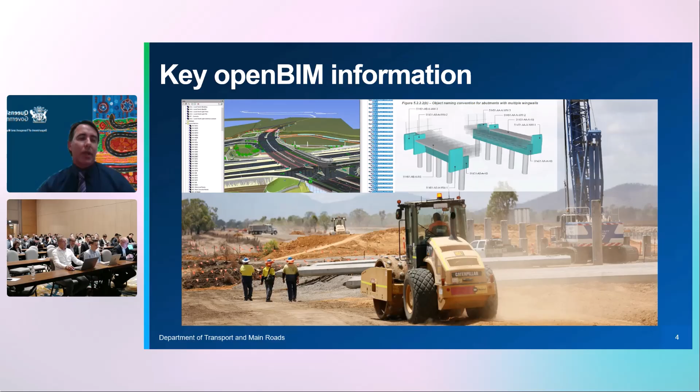TMR does not mandate the use of proprietary software. By adopting open standards such as buildingSMART's IFC and implementing ISO 19650 workflows, TMR enables industry to use their preferred software while delivering consistent, high-quality data. The system's reliance on openBIM principles ensures long-term adaptability and scalability, aligning with global best practices.

On contract award, our overarching BIM guidelines cover roles and responsibilities and direct the lead-appointed party to relevant BIM documentation downstream. Next is an Exchange Information Requirements, EIR document, accompanied by a BIM execution plan, BEP template. The BEP is the lead-appointed party's responsibility to develop in response to our EIR. TMR assesses the BEP at contract award, and we work collaboratively with the lead-appointed party as the BEP develops to meet the project's specific information requirements.

The next layer down is a suite of information delivery manuals, IDMs, that structure the data within project information models from the supply chain. Through our team's active engagement with buildingSMART Australasia, we've ensured that our IDMs are in alignment with the content and philosophy of buildingSMART's ISO 29481, the ISO standard for information delivery manuals.

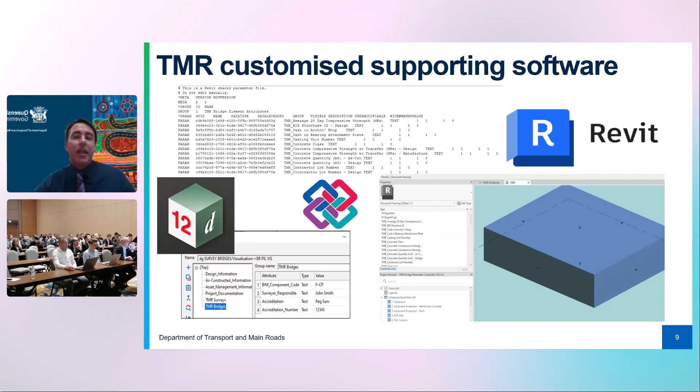TMR supports industry with customised software packages for applications that the department uses internally. We've customised both Revit and 12D with templates hosting BIM attributes. Where possible, we've applied automation to pre-fill attribute names as the user commences modelling. Our software customisations align directly with the requirements in our IFC object attribute documents and include export functionality to custom TMR IFC property sets as per our documentation.

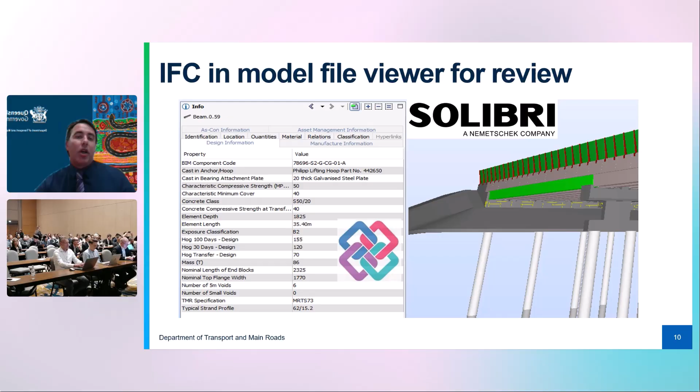The key outcome is an IFC carrying TMR custom attributes in property sets for review. Using a variety of collaboration software, the open source deliverables are reviewed against LOD and LOI requirements defined in our IDMs.

The case study submitted for this award is a TMR road and bridge infrastructure project that is currently in construction in northern Queensland. A key outcome from the Townsville Connection Road project is the real-world application of how our information delivery system supports the data from multiple engineering disciplines.

The interoperability of open source data has been leveraged through multiple software packages as the data has transitioned through each project phase from design to construction and into asset management.

On receipt of Townsville Connection Road project information models at review submission dates, our team leveraged SimpleBIM to assist with automation of review procedures. Basic examples have been applied to SimpleBIM templates that were passed against the IFC model submissions. The SimpleBIM templates interrogated the IFC structure for IFC class assignment, property set names, and attribute values.

Any non-conformances dashboarded by SimpleBIM were exported as a validation report and returned in correspondence to the lead appointed party through the common data environment.

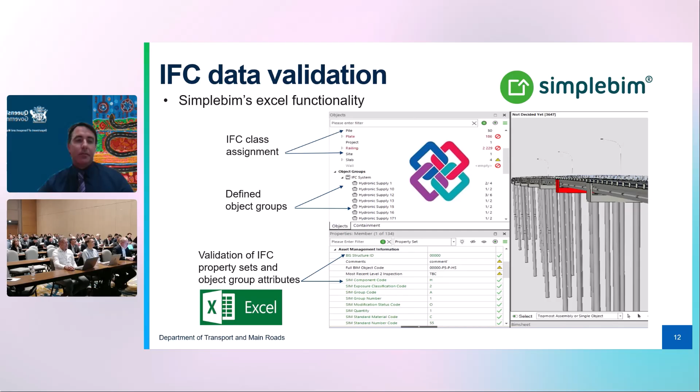The learnings from SimpleBIM validation were applied as a key outcome to progress development of buildingSMART's Information Delivery Specification, IDS. The data structure of the IFCs developed on the Townsville Connection Road project were test cases for IFC validation with IDS. Blender, with the Bonsai extension, was leveraged to export HTML validation reports of the IFC passing against the IDS.

To format the Townsville Connection Road project information models for asset management system upload, SimpleBIM was used for IFC data extraction. TMR's asset management systems do not host or support any middleware or API. All of our databases are capable of comma-delineated CSV upload. The asset management team supplies a template.

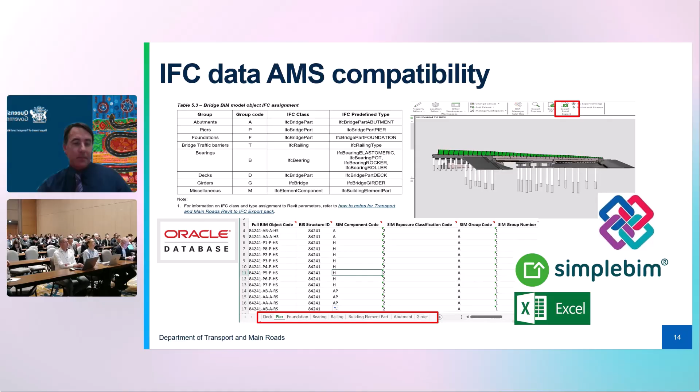From the verified project information models, the attributes of the bridge management property sets were uploaded to TMR's bridge information system, and the ITS and electrical asset management property set to TMR's road operation asset register, known as ROAR. This wakes the asset management systems up to the new assets entering construction phase. The systems are then formatted to receive construction and asset management data further downstream.

The project information IFC model on this project was produced specifically for the development of workflows and procedures for the use of IFC for bridge survey setout and construction. This IFC model is currently in use by construction surveyors setting out the structure. The model was loaded into field instrumentation, and the geometry in real-world coordinates could be read from the field instrumentation display.

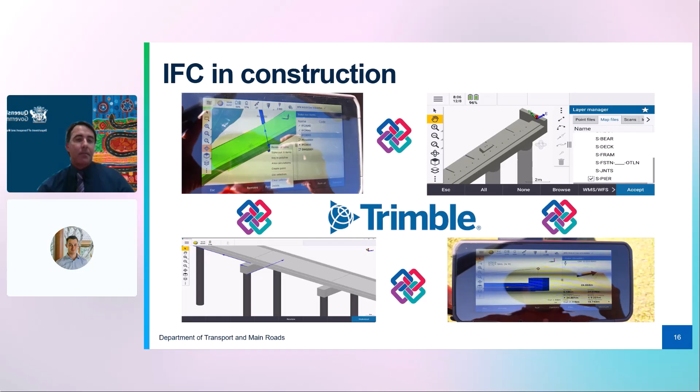A key deliverable in TMR's BIM projects is the as-constructed IFC model. The as-constructed deliverables on the Townsville Connection Road project were used as a pilot for integration with TMR's GIS framework, IMAPS. IMAPS publishes asset management data for TMR's civil infrastructure across the state of Queensland. All attributes and property sets were assigned to IMAPS for future reference.

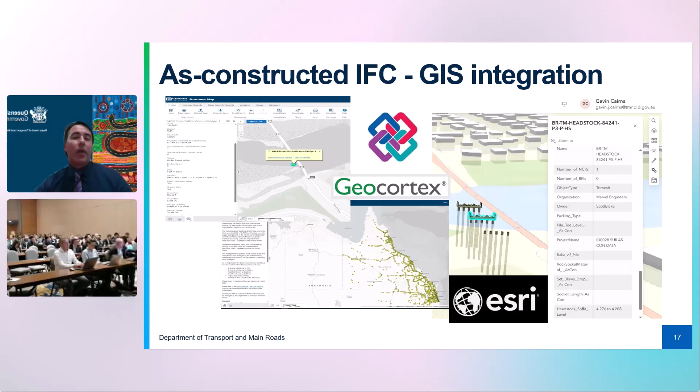TMR's BIM object coding becomes critical again here, containing fields that our asset management system recognises. IMAPS sources and publishes data from various linked Oracle asset management platforms and dashboards asset data for users. This advancement will see the ongoing collection of certified as-constructed IFCs, georeferenced, and data published for query during operation and maintenance for our statewide network.

openBIM has delivered significant benefits to TMR's asset management processes. Efficiency gains: automating data validation and integration has eliminated the need for manual data entry, which previously involved hundreds of lines of information retrieved from project drawings. This has resulted in substantial time and cost savings.

Data accuracy: the structured approach to IFC property set definitions and validation ensures that accurate, high-quality data is uploaded into asset management systems. Lifecycle asset management: BIM data integration into asset management systems and GIS supports asset management activities throughout the life cycle of infrastructure, from design through to operation and maintenance.

Interoperability: the adoption of openBIM standards such as IFC ensures compatibility across software platforms, enabling industry partners to work collaboratively while meeting TMR's information requirements. This initiative demonstrates how openBIM can bring value to infrastructure projects by fostering efficiency, collaboration, and long-term asset sustainability. By adopting openBIM tools and methodologies, TMR has demonstrated its commitment to delivering infrastructure efficiently and effectively for the people of Queensland.

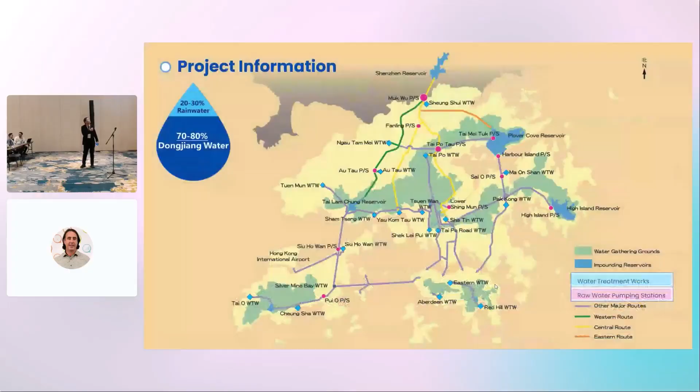Okay, so here is the map of Hong Kong. Actually, it is the entire map. Our goal is to use the digital twin solution to digitize our physical asset.

As you can see, the red and blue dots and colored lines represent our water treatment plants, pumping stations, and water mains, large water mains. These assets are interconnected, and they serve over 7 million people in Hong Kong.

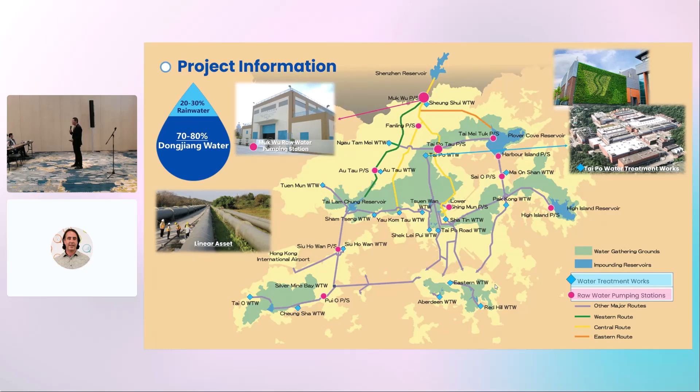We use BIM to support the digital twin, enabling ongoing optimization and improvement, and that is the asset management as well as energy management.

We are using openBIM and BIM data to build a smarter, greener infrastructure with investment of 56 million and over 40 experts from IT, BIM, and hydroinformatics.

We are creating a digital twin that helps us manage assets better and more effectively. So better and stronger.

Well, I always, when I see Stephen Hawking, he always explained the universe is called a cosmic cookbook. This is our digital transformation cookbook. We have 4 ingredients, which is the BIM, AI, GIS, and IoT.

The system integration is vital to our success. Using the openBIM framework, we combine BIM, GIS, IoT, and AI technology to deliver real-time insight, inform decision-making, and enable intelligent operation across every water infrastructure asset.

We have many BIM models, I'm sure, like the government agency or the commercial areas. So we have a lot of BIMs, but after the design construction, what are you going to do about it? How do you drive the value from the BIM models?

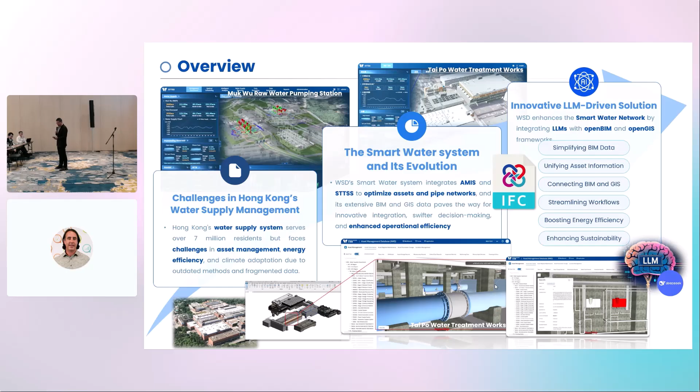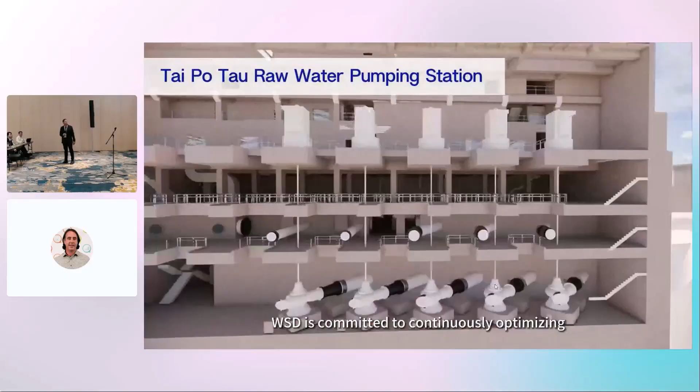Our goal is to build a system that is both sustainable and resilient. This pilot project marks a major step in that journey, integrating openBIM and openGIS standards into STTSS and AMIS to enhance asset and energy management.

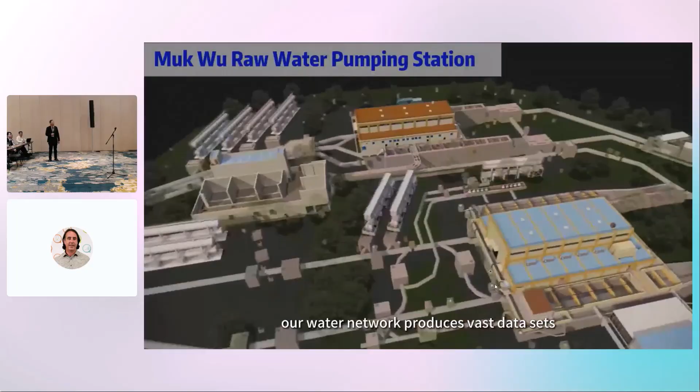Most recently, we've introduced large language models to further strengthen our smart water operations. This framework reflects years of advancement. Our water network produces vast datasets, from IoT sensor streams to detailed BIM models.

We apply lightweighting techniques, using tools like Supermap, to reduce system load while preserving essential detail. openBIM and openGIS form the backbone. IFC structures asset data in AMIS. GeoJSON organizes spatial data in STTSS.

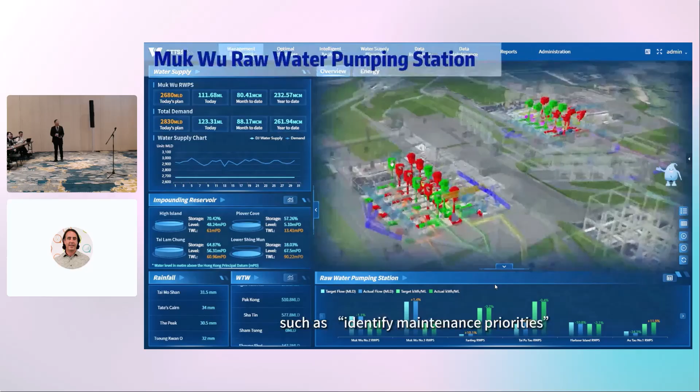Now, LLM enhances the ecosystem by connecting, analyzing, and making the data more actionable across operation and maintenance. Operators can now issue simple commands such as identify maintenance priorities or optimize pump schedules. The LLM responds intelligently, trained on historical records and simulation logic, leading to reduced energy use, operational cost, and risk.

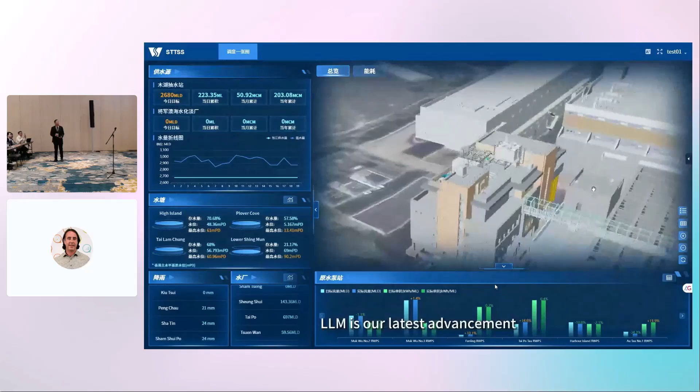With openBIM and openGIS, we've built a connected, visualized system. LLM is our latest advancement. We collaborated with global water experts and shared our AI-driven openBIM innovations, fostering the adoption of sustainable practices, bringing us closer to a sustainable, intelligent, and operator-centric future.

openBIM is key to building a smart digital twin. Basically, openBIM or BIM is the backbone of the digital twin. It must be. It helps us enable smooth data sharing and interoperability for our asset management information system.

Basically, it supports the asset management system, ISO 55000. And our smart trunk transfer support system also supports our energy management policy, ISO 50001. So basically, it's asset management and energy management. We have 2 systems supporting us.

In the ecosystem, our software solutions always support the openBIM standards because our assets are designed to operate over long lifespans. Actually, our Water Supplies Department has 160 years of history.

Not surprising, we have water mains over 50 years old. So several decades to over a century.

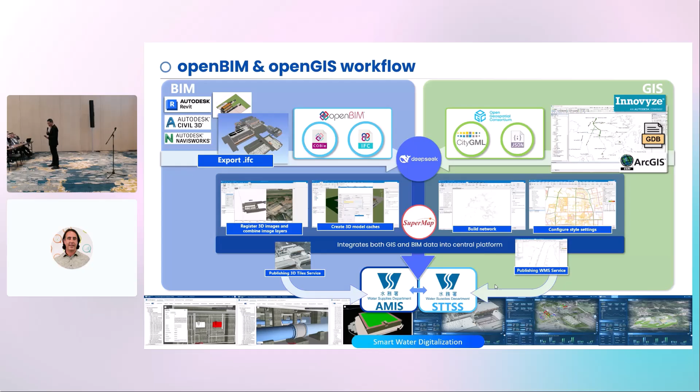So right people, right information, at the right time. This is our goal. For the workflow, we integrate openBIM into our workflow to standardize data and ensure interoperability and seamless data integration. It also enables smooth, efficient digital handover, essential for effective asset management and smart operations.

We need to instruct the AI to filter the raw data and remove non-essential information. This ensures that only critical asset and operation data are retained in the BIM model, maintaining an optimal level of detail for effective integration and streamlined workflow. You have a BIM model, you need to filter off the information that is not essential, and we managed to push the efficiency up, saving 58%. So you need a faster model in order to allow our users to work on it.

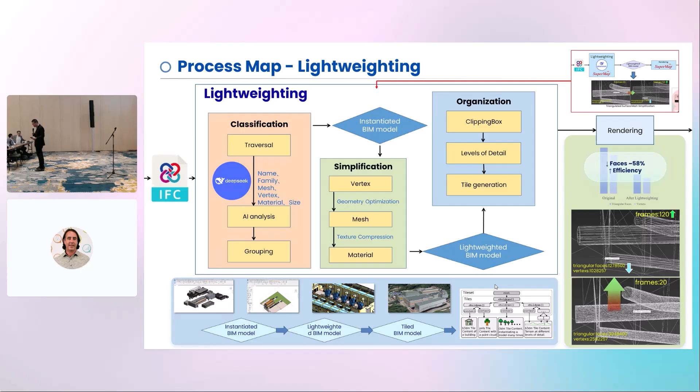This actually I'm quite proud to show you. For the BIM model of the underground asset, I call it SAD and LAD. SAD is a surface asset database — the pumping station, treatment works, reservoirs, access road, all these are called surface SAD. And the LAD is actually, in Hong Kong, we have over 8,000 kilometers of water mains. So basically it's two different classes of asset, but we need an integrated system to pull this asset together. We have BIM, we have a digital mapping system, and we also have a work order system.

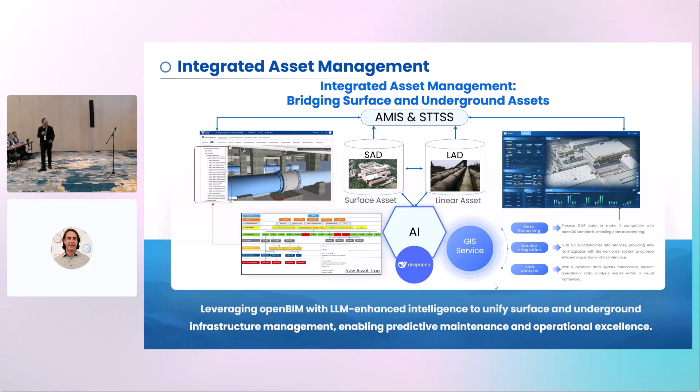So you need to keep track of the cost. So how do you do it? Of course, I'm going to show you. We also developed the smart trunk transfer support system. This is basically the same process as the AMIS, except the challenge is the geospatial aspect. So it's 2D, 3D, and at the same time, the digital mapping system all working together for the energy optimizations.

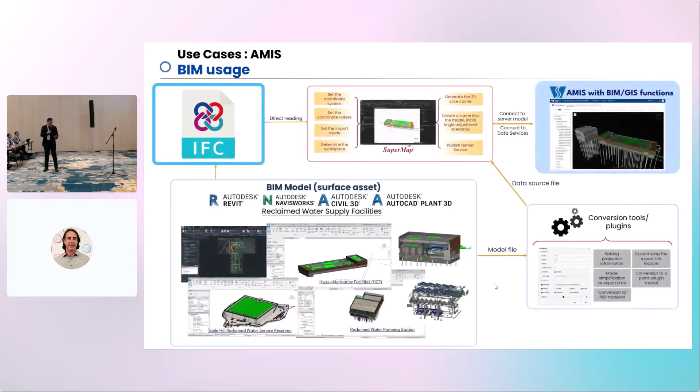So AMIS used openBIM to connect asset data, model, and inspection. It ensures consistency with IFC, supports risk detection via LLM, the large language model, and enables smart mobile-driven maintenance for efficient asset management. We have a mobile device to capture the asset conditions. So the operator will go to the site, use the QR code to recognize the asset, and then keep track of the asset condition.

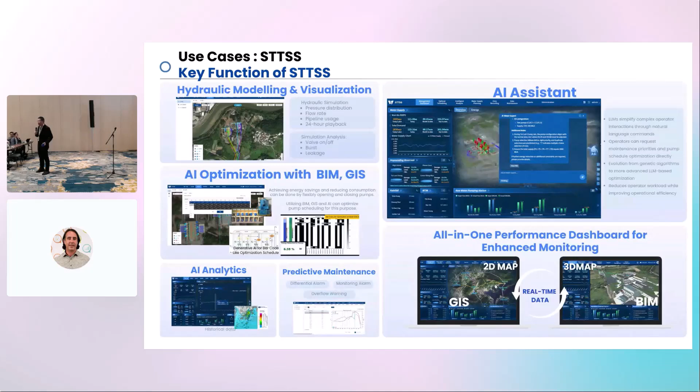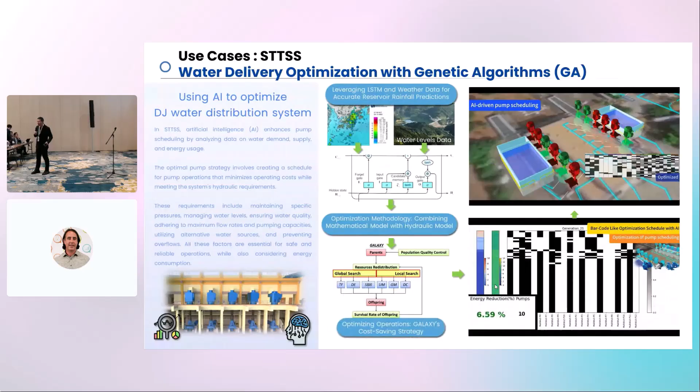If we do the maintenance, we must understand what the asset condition is. It's simple, right? If you know the conditions, you will be able to do predictive maintenance, condition monitoring. You're able to save money on maintenance, electricity, and energy costs as well. Simply said, we want our assets to be healthy. Simple as that, okay?

For the STTSS, for our projects, we spend about $300 million for electricity bills every year. So we import water from China — it costs us 3.4 billion a year, and the energy cost alone is 300 million a year. So we'd like to optimize the energy for the pumping schedule optimization. This is basically the system that we developed.

So our KPI is maintenance cost reduction. It's like a human — we keep ourselves healthy, we spend less on medical and healthcare stuff, okay? Energy-wise, for the pump scheduling, we are able to do it smartly, so we can save energy. It's not that difficult. And then carbon reduction and data integration — this is all because of BIM. We need good data and we need a good model, and then we need an openBIM framework. So it's openBIM framework, openBIM standard, and good asset data to do our business well.

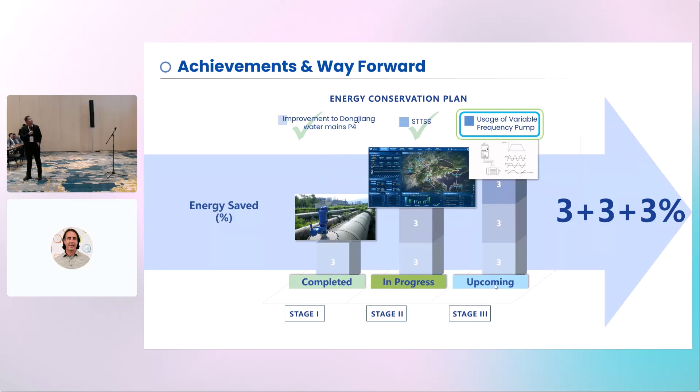So when we upgrade our system with the variable frequency pump, it can save up to 30 million a year in electricity, and 18,000 metric tons of CO2.

So actually we have achieved the SDGs by 3%, so it's 10 million. It's a real saving, because I checked it in the electricity bill and compared it with last year's electricity bill. So it is true. And I'm accountable to my director and assistant director on that as well.

So you have a BIM model, but you need to downsize it or make it fit to work in the platform that we develop. Okay, so BIM and GIS and the asset management platform to monitor energy for energy savings.

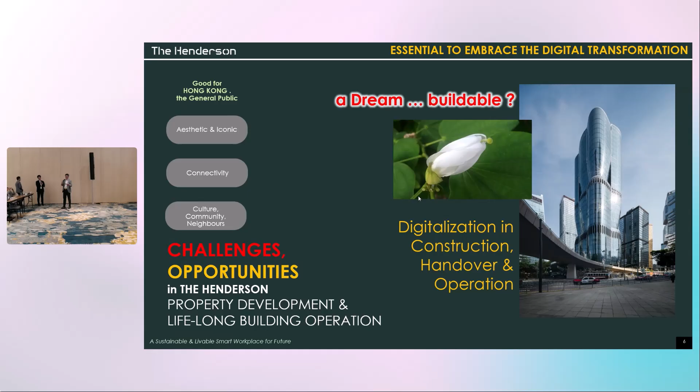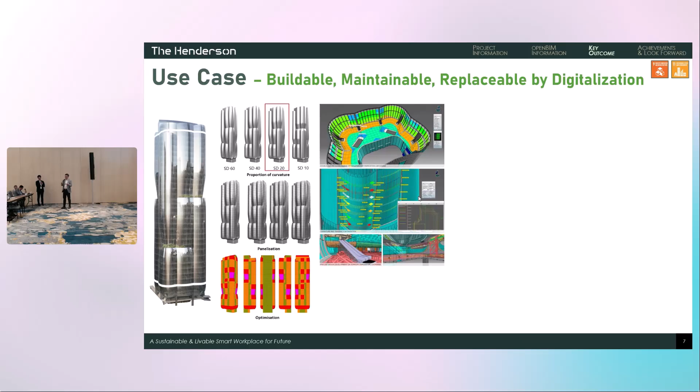After the facade optimization process, we finally still have over 1,000 different curvatures of facade panels, so it's definitely not feasible, not buildable by traditional construction method. So in our case, what we have done is go through construction digitization. We don't have any spare parts, so in case we have to order any piece of new glass in the operation stage, we go through the same digitization process in the manufacturing.

The second challenge is climate change, extreme weather, public health and safety. Those are the prominent challenges nowadays. openBIM is useful in building up models, for example computational environmental modeling, operational resilience, asset database, and also BIM integrated facility management portal. For all the glass panels, we have the latest BIM model for factory fabrication.

We have openBIM models for asset management. We also have the combined BIM model going to our facility management portal, and we keep all those models in the CDE as the single source of truth.

In the case any glass replacement is required, what we have done is just use the RFID scanner, scan the glass, get the access, and then we order the glass.

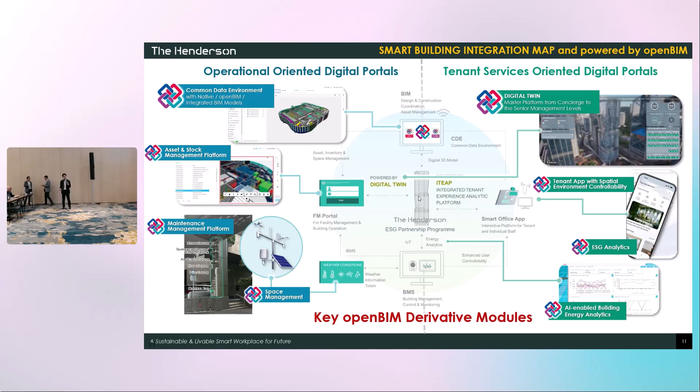Here we come to the main contractor's perspective, so it's about the technical part. Throughout the project lifecycle, we have used different software in terms of their expertise, like Revit, Tekla, CATIA, or Digital Project. And then we federate the information through openBIM to support the wide diversity of expertise, enabling day-to-day smooth coordination, fabrication, and then operation.

There's a saying, Rome wasn't built in a day - so that's a good model. An asset model cannot be built by one party, right? So starting from the delivery stage, our client developer already stipulated in the contract IDM that all the key stakeholders must engage in full BIM authoring, openBIM exchange, and CDE use. We, as lead of the execution party, standardized the IFC exchange protocol from different software by defining the right model view definition.

And then it results in seamless collaboration from level of information need 300 to 400. We also use BCF as a neutralized medium for issue tracking in Solibri, in Trimble Connect, and so on.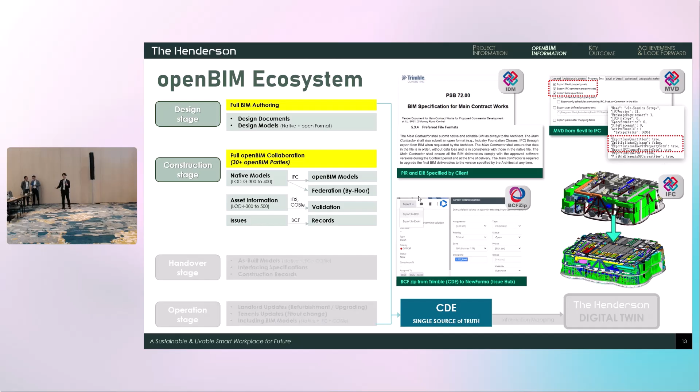At handover stage, we formed a facility management task force early, 2 years before occupation, aiming to develop a proprietary COBie cookbook for Henderson, which we wanted to be rigorously standardized and friendly understandable by all the parties. Here, we want to express our thanks to buildingSMART bSDD and UCM, and also the Hong Kong government, who shared a lot of asset protocol through bSDD online, so that we do treasure their references there.

Additionally, we use the IDS to validate our subcontractors' input in the as-built models, ensuring that they have input the key parameters like asset code, asset group, and room parameters. At the handover stage, we form...

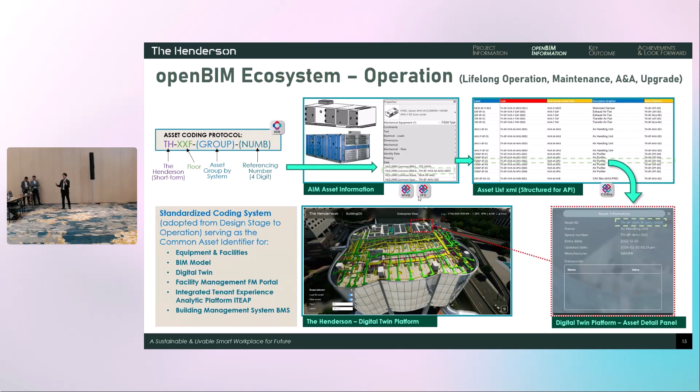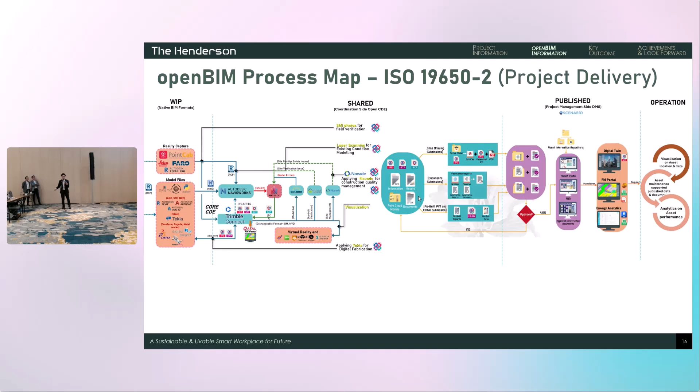Now we are going to the long lifespan operation stage. The key information is asset code. It is vital because it acts like the human being identity card number to link all the asset-related attributes between BIM and operational digital twin platforms. As we have deployed a meticulous open BIM process during the delivery, design, and construction stages, we are now enjoying a bright road of data sustainability in the operation stage.

We want to lead ISO 19650 to the 3rd chapter, not only about maintenance, but also about future delivery, like renovations. So our end users, tenants, must take part. They need to update their asset model in IFC and IDS, and then submit the data to our facility managers through the common data environment, so that over 1 million pieces of data can fit and dance in the digital twin platforms. We are confident that this pioneer project sets the anchor of openBIM sustainability, especially on the private developer side. We are also dedicated to share our experience with the government, who wants to launch openBIM in statutory submissions by 2029, because in the delivery stage we set an anchor of openBIM foundation.

Now, Edward will tell us more about how we can use the functions.

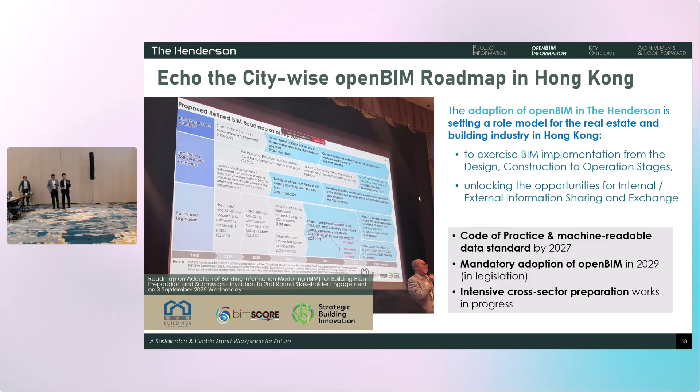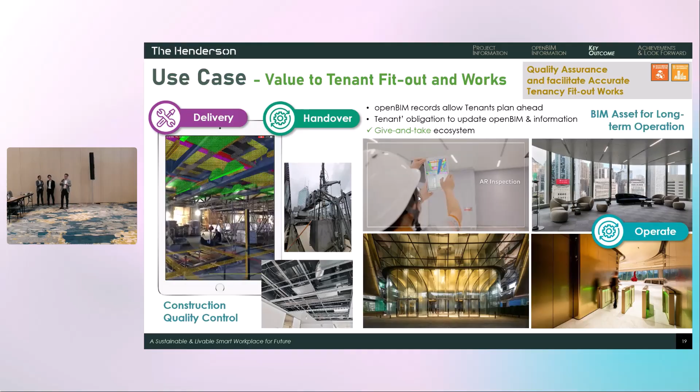In the handover stage, we adopted laser scanning and augmented reality technologies to carry out quality checks on site, and also ensure what is being handed over to our tenants and customers is consistent with the as-built drawings. When a tenant moves in and prepares for fitting out, they have to provide their BIM model, and then we integrate that BIM model into our building master BIM model, and also update our digital twin.

The BIM is integrated into the facility management portal, as mentioned before, in the handover stage, and the asset information and corresponding BIM model can be used on the web-based and app-based platforms, which are useful for maintenance on site and also for connecting with the preventive maintenance module.

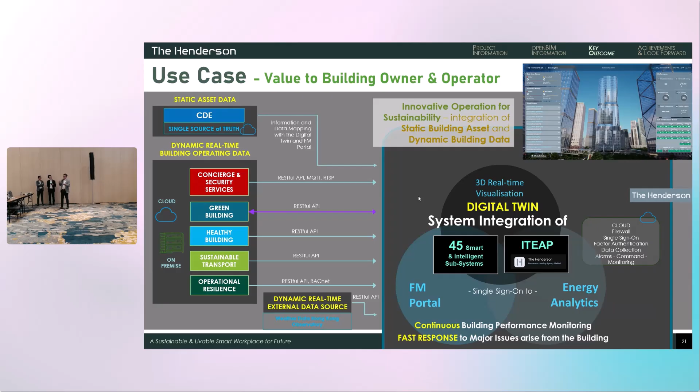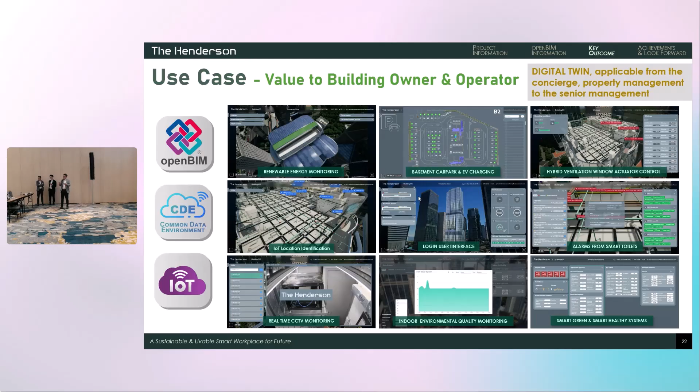The purpose of the digital twin is to realize data-driven building operational management, spatially enabled by openBIM technologies. The digital twin is now connecting with 45 smart systems inside the building via different communication protocols. Those are some user interfaces of our digital twin you can see in actual building operation. The spatial model originates from the BIM model but is visually enhanced to game engine standard.

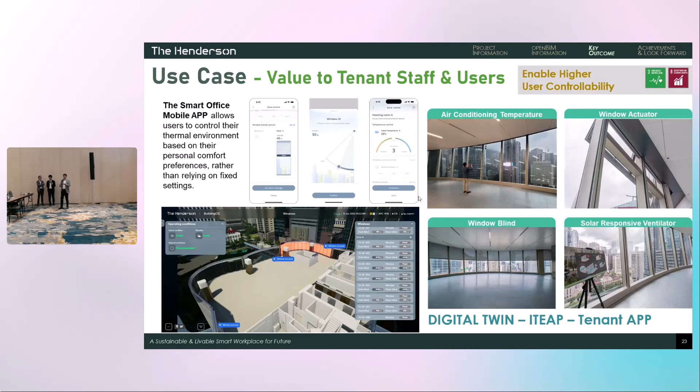The office interior environmental controls, such as solar blinds, motorized openable windows, and room temperature, are all connected with the digital twin and the smart tenant apps. Each of the devices is mapped with the static asset data in the BIM and also the dynamic data points from the building system, to ensure seamless control and monitoring of the indoor environment by our individual users.

Henderson is getting tenants and individual staff involved in the ESG journey. They collect and analyze energy, water, waste audit, and carbon data from both landlord and tenant sides. These are part of our ESG partnership with tenants and individual staff, embracing carbon neutrality, health and well-being, integrated culture, and partnership for good.

As a successful openBIM and digital transformation showcase now in operation, we have put extra effort into sharing our experience and technology know-how with the industry, practitioners, and students. Just like last year, we offered our sharing at the buildingSMART Asia Summit, followed up with a technical visit to the Henderson.

Because we have been collecting a lot of data from our digital platforms, such as the local weather station, the car park, or even the electrical vehicle charging station, our digital twin is ready to share that data with the citywide open data, smart city open data platform, or exchange it with other external data sources.

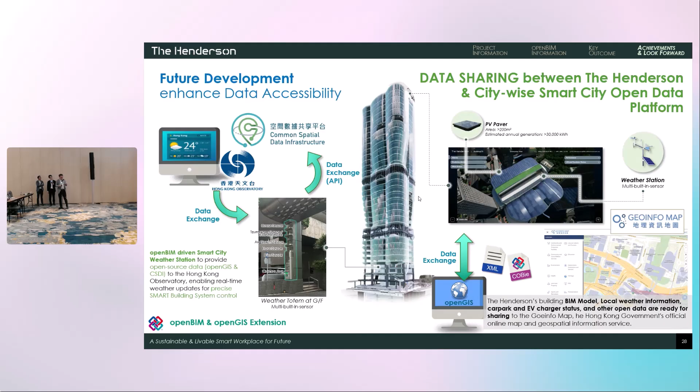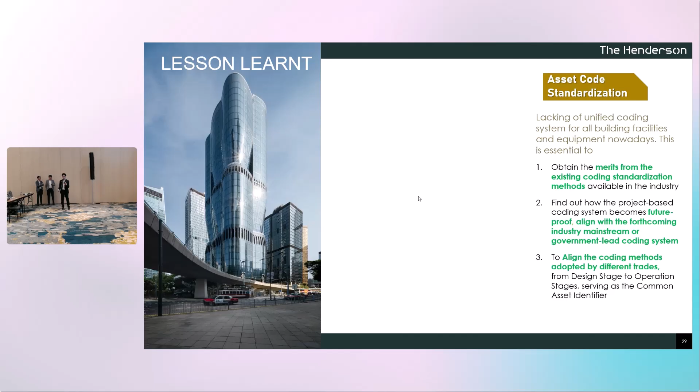The second lesson is engagement. Getting the whole team into the openBIM collaboration platform, we need to set up a dashboard and frequently monitor all parties' engagement to encourage those who are reluctant to use the CDE. The overall result is constructive, and we really encourage them to cultivate a good mindset. We value both top-down and bottom-up opinions.

In our capacity as developer, owner, and operator of the Henderson, the overall project management strategy obtained the blessing and budget from our top management, and getting the right mastermind, the right team, and setting out the roadmap are all beneficial to the openBIM journey. Many people are involved in the operation stage, so successfully influencing internal stakeholders will be crucial. That is the end of our presentation. Thank you very much.

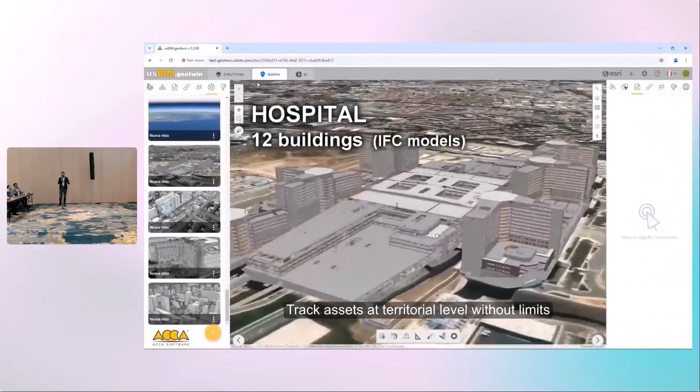Hello everyone. Today I would like to talk to you about usBIM.geotwin, openBIM GIS Digital Twin. First of all, what is it? It is a system that allows us to keep track of important assets at a territorial level without limits on the number of IFC models used and their extension.

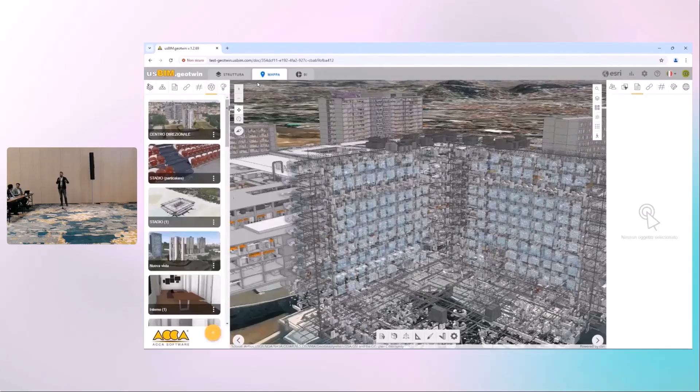openBIM is always at the center because it allows democratization of information, meaning that it is cheap and accessible to everyone. IFCs are always at the center, while IDSs, information delivery specifications, are used to make sure that data is actually in the models and for collaboration with other external systems, such as GIS, facility management, and so on. We will see more on that later.

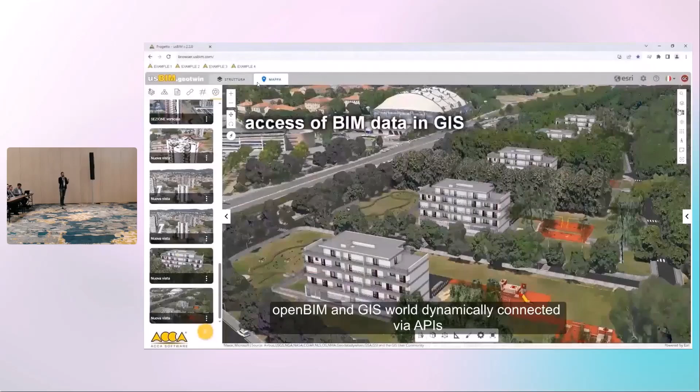Such connections are bidirectional and dynamic and done via APIs, meaning that the exchange is in real time. So from the openBIM model, I can go through the GIS data, and vice versa, from the GIS world I can query the openBIM models.

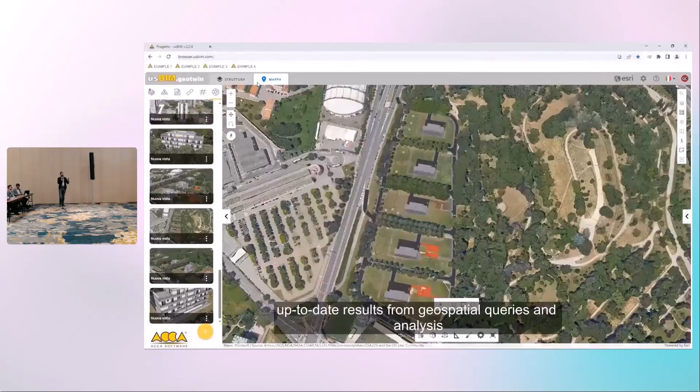What that means is that when we use tools such as spatial queries and analysis, we get real-time results directly taking the data from the openBIM models.

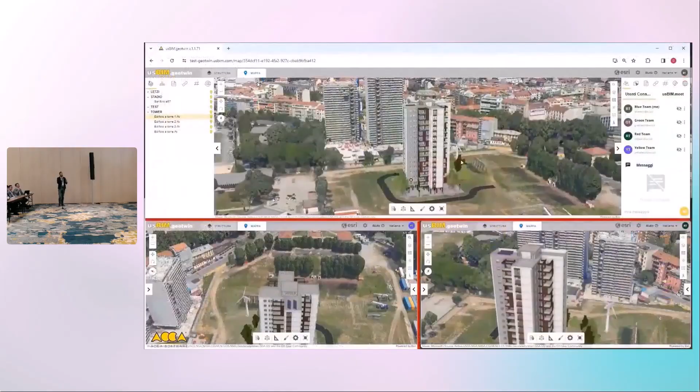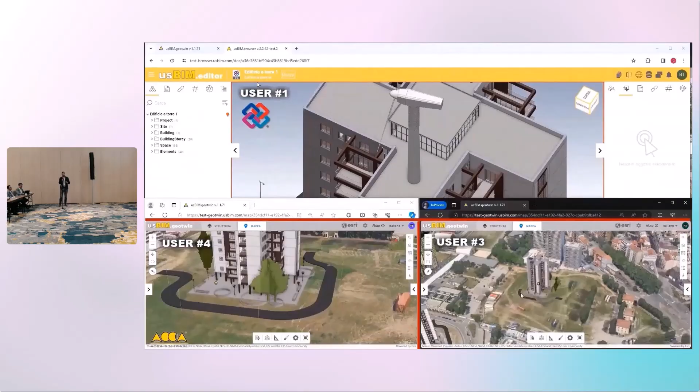At the foundation of all of this is the ability to edit the IFC models, because we think this is fundamental - in the operations phase, we can be many years after the handover, where we cannot rely anymore on the BIM authoring software that produced the openBIM model in the first place. So there is the ability to edit such models dynamically, both from a geometrical point of view and about the data.

BIM and GIS users are not disrupted in their jobs, meaning they continue their independent operations. Other standards that are used are the BSDD for standardizing the information used, and the BCF, the BIM collaboration format, for communications among the users.

But let's see some real-world examples. The objective that we have in mind is quite clear. We want an enhanced operation phase, and we want to make use of our digital twin to not make it just a mere digital shadow.

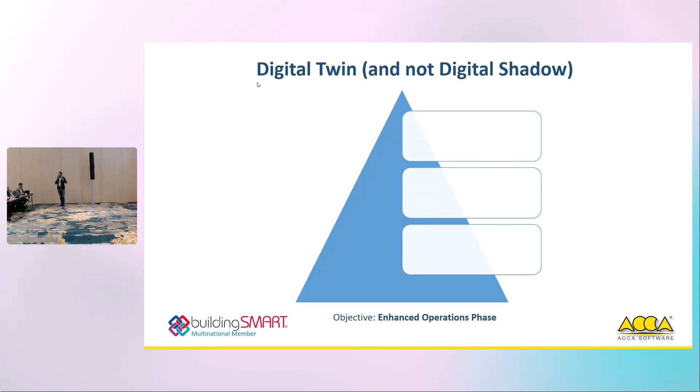As a minimum, we would like to be able to use our openBIM models from different actors and different people. And of course, we would like to be able to digitize the inspection and maintenance process. This alone will be worth the effort of creating the digital twin and keeping it up to date. So let's start with an example.

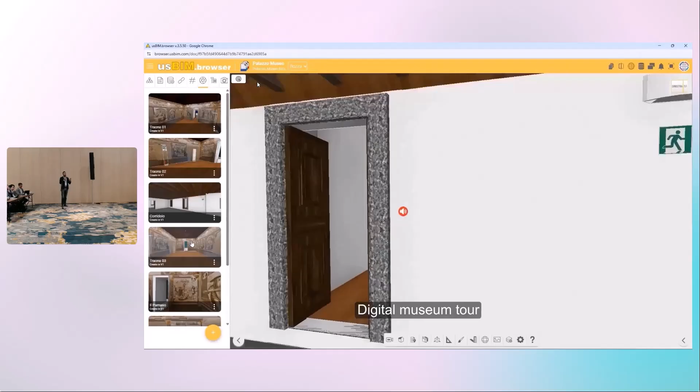This is the Besta Museum from Italy, a small one, but very important nonetheless. First of all, we can take a digital museum tour so people can experience it, for example, by consulting painting documentation. Just a technical note - as IFC is not very texture friendly, textures have been overlaid on top of the IFC model. But we can consult the documentation.

We can talk with an AI companion or smart guide to ask during our digital tour about specifics of the paintings, but also in general about trivia about the museum. Audio guides and other accessibility tools are very friendly, also for impaired people, to make the model accessible to everyone.

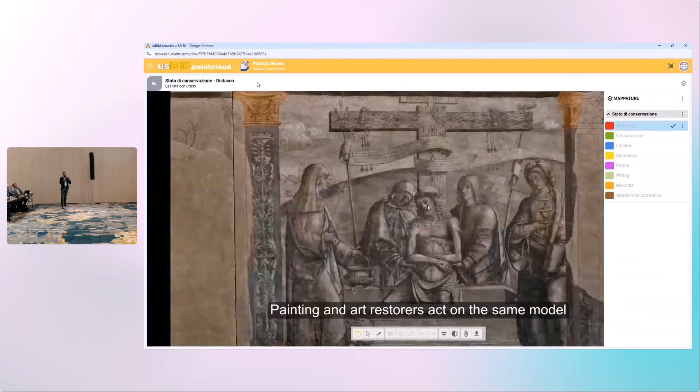Different users, completely different users like painting and art restorers, are using the very same model, taking the defects of the painting for their maintenance processes, but always acting on the same IFC data underneath.

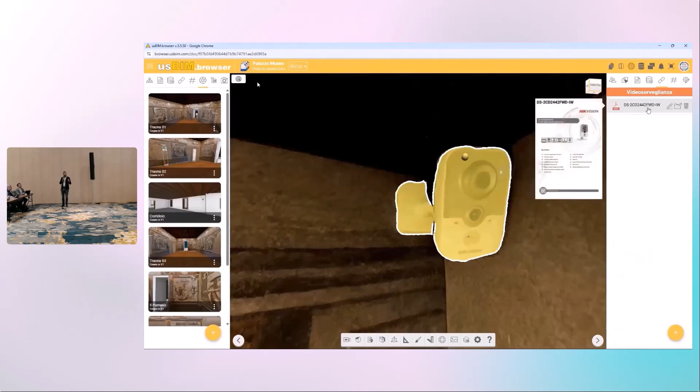There's the possibility to enhance the model, for example, after a survey with cloud points - the possibility to create new objects, segmenting in an automatic or semi-automatic way, which allows creation of new objects, attaching documentation, and so on.

In general, updating the IFC model is very important for this museum because they host many temporary events and the furnishing needs to be rearranged. So again, we cannot rely on the original BIM authoring software that created the model for that.

Also, all the objects that are being added or moved around are directly connected with their asset management system in a bidirectional way. What does that mean?

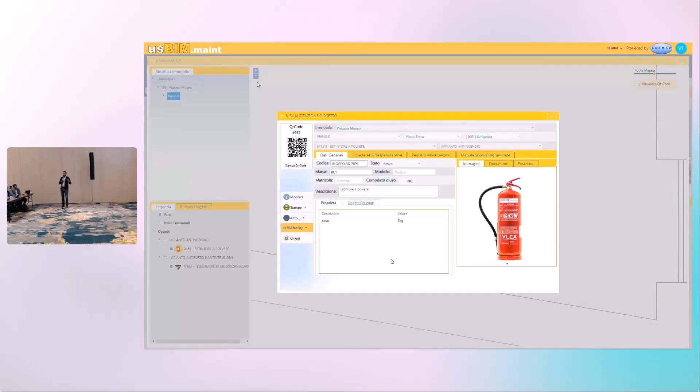We can inspect the asset management system of the museum, identifying the assets and seeing the tickets that are open, the status of the maintenance, and so on - again, from a completely different set of users.

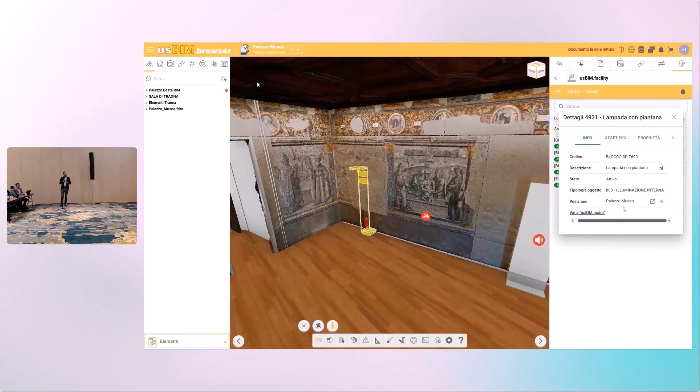From there, we can decide to go to the model because we have this bidirectional connection with the objects. And from the model, we can select the objects and see the status of the tickets directly in a dynamic way with the asset management system. Again, same IFC model, different actors. So the IFC model on the CDE is the single source of truth for all the operations.

Now, we also want to be able to gather data that comes from the asset in the real world and bring it to the digital twin. Then we would like to be able to do some analysis on such data, because we would like to see what happens on the territorial scale, to see where we have to put intervention.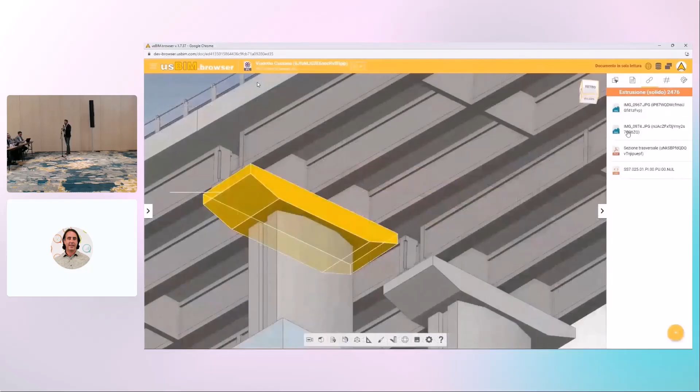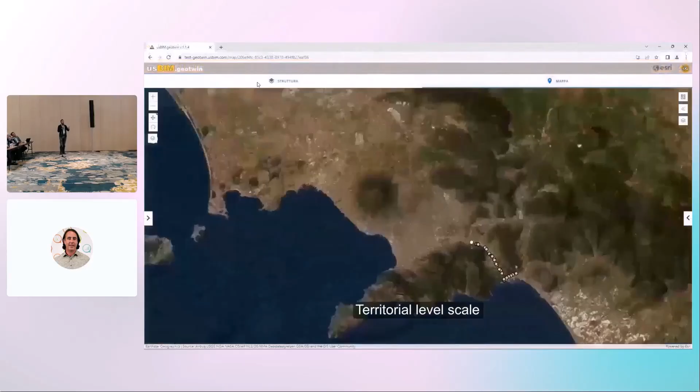This allows the system to automatically calculate the damage level for the single object and for the bridge as a whole. But it is when we scale up at territorial level that we see the real potential. Road owners, a completely different category of users, can see on the territorial scale where the problem lies, where to put their money for intervention, and where there is a critical need for intervention, all while other users are keeping the system updated with the results of new inspections. And again, the IFC models are always at the center of all the operations.

This is another example, from RFI, Rete Ferroviaria Italiana, a public company for railway in Italy. First of all, for their digital twin, it's very important to have the possibility to insert new IFC models and make them take part of all the operations that other models are already doing. So this model is in constant evolution.

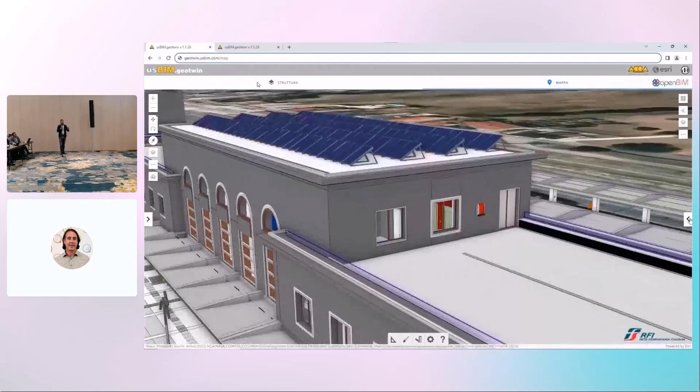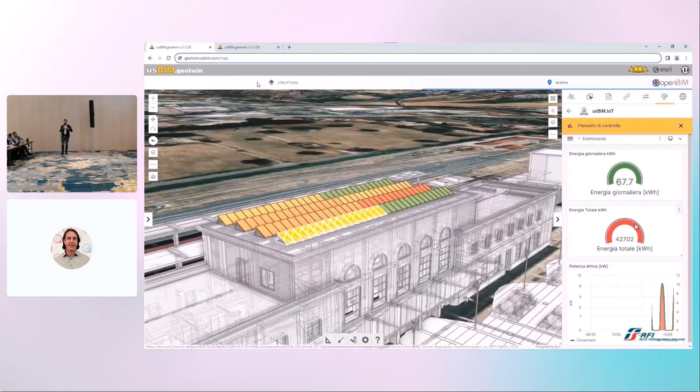One example is the connection of some of their station photovoltaic systems with IoT sensors. So we are gathering data in real time and geolocalizing and showing such information directly on the IFC model. Put this on a scale with many stations, and we are gathering data from different photovoltaic sources and bringing this data for analysis.

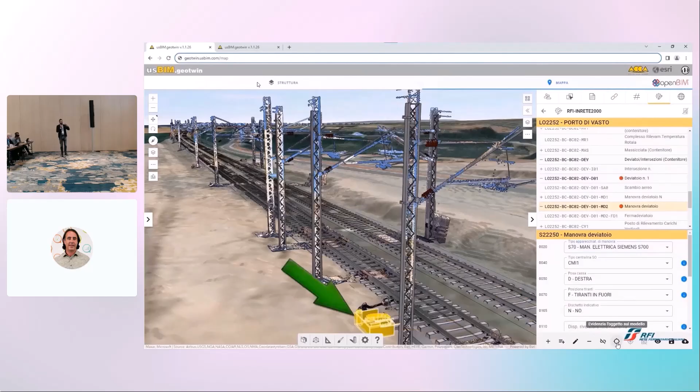Last but not least, to make the digital twin really dynamic, there is a bidirectional connection with their facility management system InRete2000, which allows updating the IFC model, which in turn updates the facility management system, and vice versa. Users from the facility management system can change the values, and the IFC model gets updated accordingly to the RFI needs and specifications.

Ideally, we would also like to be able to gather all of such data from the real world, put it on the digital twin, and run simulations on it, and to analyze such data with the business intelligence connection, because we would like to make risk prevention, to define what such risk criteria are, and to be able to analyze the data to act accordingly to prevent them or mitigate them.

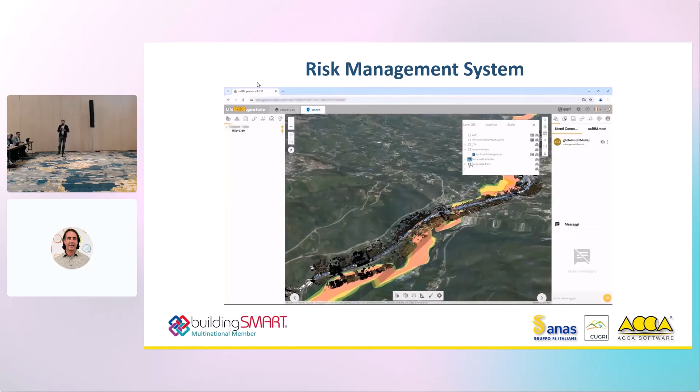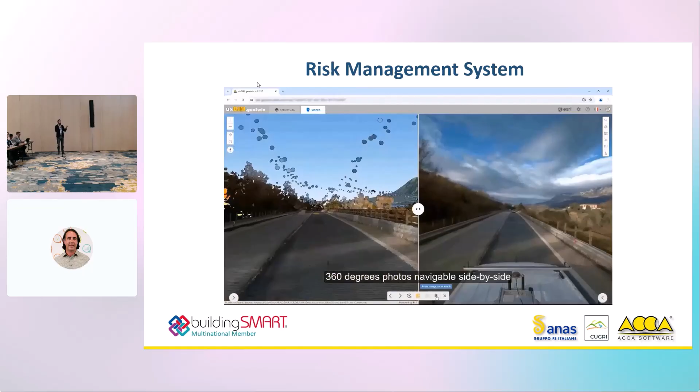This is another example, again from CUGRI, this time in collaboration with ANAS, the Italian public company for roads and bridges. First of all, we can see GIS data on geohazard risks combined with the model, and we have the possibility to make a walk along the alignment of the road, and to also have other kinds of data, such as 360 degree photos, navigable side by side. At each point, we can stop and see what is the associated geohazard risk level at that point of the road by querying the information on the GIS side.

But as I was saying, it's important to have the possibility to gather data in a standardized way. This means road owners can decide how the different users of the system have to gather different kinds of data. It can be data about road accidents, for example, or data about road defects that can be geolocalized in the model. It doesn't matter how they decide the data is structured, because then they can collect data from all the users of the system and put them into analysis with the BI, business intelligence, integration.

So take, for example, the risk of car accidents. Once data is collected and structured in this way, we can use interactive dashboards and BI analysis to analyze the causes and consequences of such accidents, and also plan to minimize the same risks in the future. For example, we can expect similar roads which may behave the same way, so by solving a problem on one part of the territory, we can also have a solution or mitigation for other parts as well. But with business intelligence, this is the power that we can analyze the data that we gathered in a standardized way from the different users of the system.

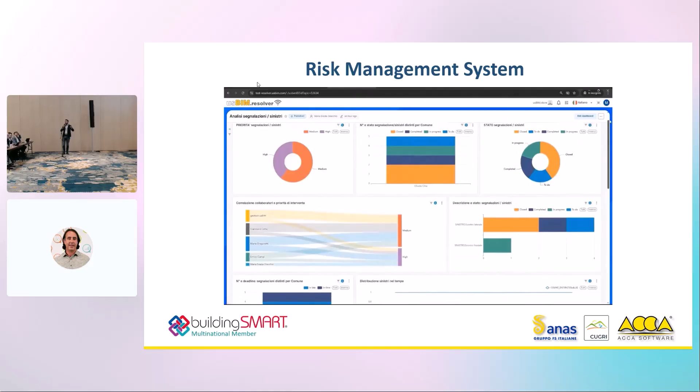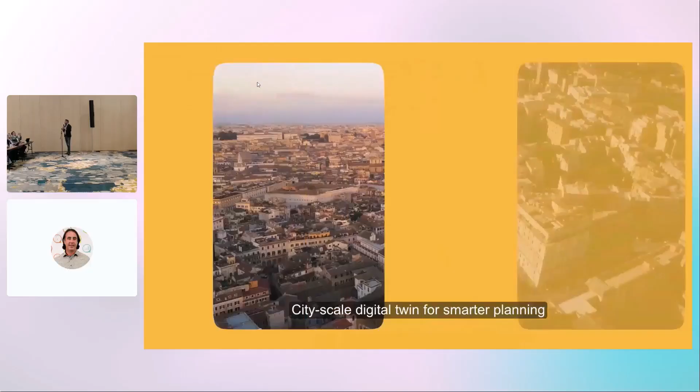Last but not least, a project fully dedicated to sustainability. It is called Rome Open to the Future and is a collaboration between ACCA Software, Esri Italy, and the municipality of Rome. It shows how to combine openBIM and GIS information to achieve some of the sustainability goals of the municipality of Rome, using data about mobility, green areas, services, energy, life cycle impacts, and so on to make strategic decisions.

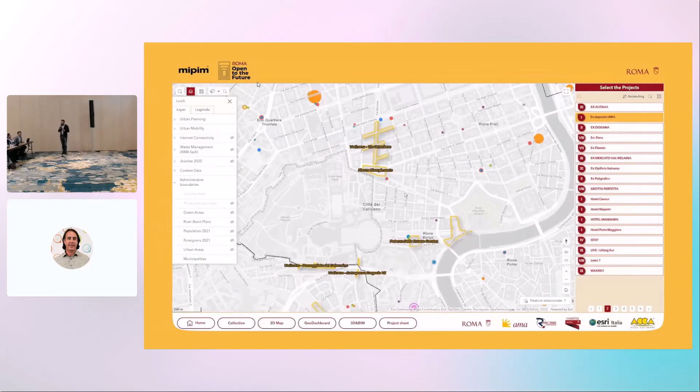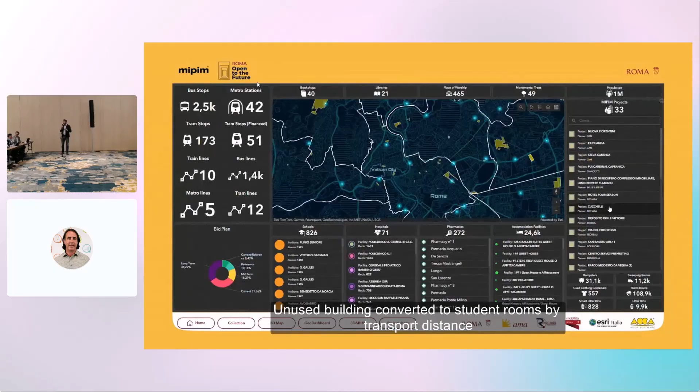One example is the refurbishing of some old buildings into student rooms, chosen by strategically planning the distance to travel services and other strategic factors. This is the example.

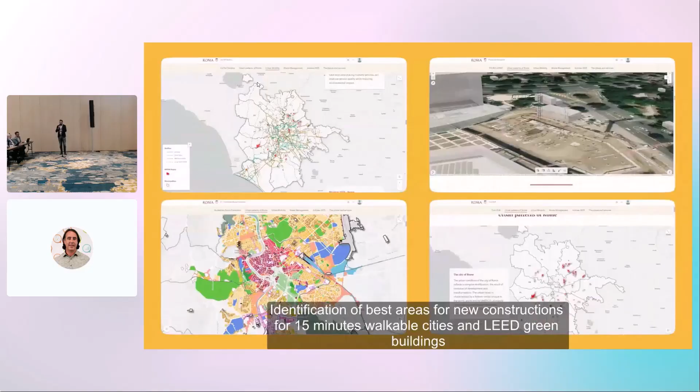There is also a refurbishing of a historic architectural building into a hotel, keeping intact its architectural beauty and storing in IFC parameters the sustainability impact values, which have also been used in another finalist project, BIM Sustainability.

In general, identification of best areas for new construction, keeping in mind the 15 minute walkable cities concept, and environmental analysis for achieving LEED green buildings, which is one of the goals of Rome, and of course, not only Rome.

So in short, I hope I've shown you how Rome is using openBIM and GIS data connected together to achieve some of its sustainability goals.